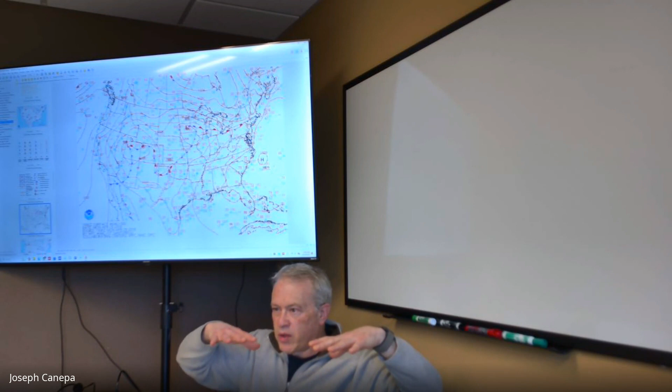And you can see here's another occluded front right here where there's two fronts that are slamming into each other. This front right here is moving slower. This one's moving faster and it catches up to it. So if you've got a warm front, warm air here, you've got cold air and it's moving toward that warm air. Because the cold air is denser, it slides underneath the warm front.

And you also have situations where you've got a warm front here, let's say, and a cold front here, and the warm front moves this way. And again, warm air is lighter, right? So just like a hot air balloon rises, it's going to climb over that cold front. That's an occluded front as well. So that's the difference between stationary fronts, the symbol right here, and the occluded front. And you can see it's got the combination barbs. Notice there's no colors here.

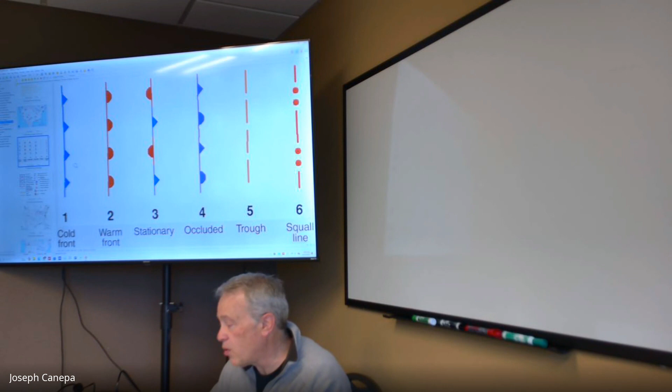It's just one color. So a lot of times you'll look at aviation charts or weather maps. They won't show colors for the maps. It's just the symbol itself. Again, the mnemonic I always use: cold fronts are biting cold. Okay, so here's all the different front symbols. You don't have to know all of these. The primary ones are these up here. So the cold fronts, warm fronts, stationary fronts, and occluded fronts.

Let's see here. Yeah, these are less important. This has to do with frontogenesis, the generation of fronts, and you're not going to see them on the FAA test. Trough, all that is, is just an area of low. When you think of trough, you think of something that's deep, like a feeding trough, so it moves down. So we associate troughs with low pressure. So you might see a line. Well, that's just a line of low pressure. That's all that is.

Here. Dry line again. Squall lines, obviously you want to be aware of what a squall line is. A squall line is a fast moving cold front, usually at the leading edge of fast moving cold fronts, and especially if you have water vapor in the atmosphere and you've got instability in the atmosphere, you're going to get thunderstorms. Now this last week, we were just talking about it. There was a very weak squall line that moved through the area here.

And all along, if you were to actually look at the weather map, and I encourage you guys to do this, look at a radar map when we have weather moving through, so you get familiar with how it looks. But what happens is on the leading edge of the cold front, it's pushing up all that air, and it's creating instability in the atmosphere. Because you've got cold air moving under the warm, damp air, it's creating these thunderstorms, and that's what happened with the squall line this last week.

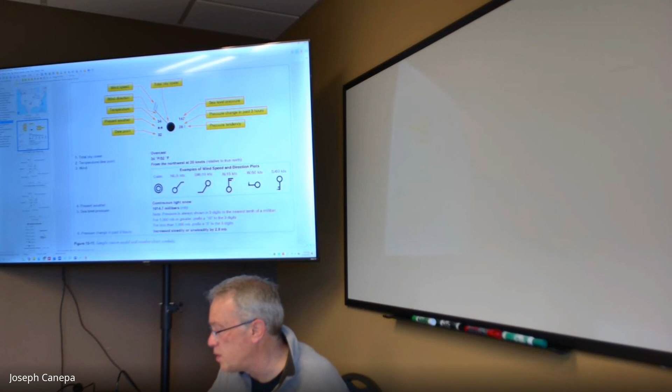Let's see here. Let's go to here. These are some different symbols that you see for winds. Here's another type of symbol that you'll see. Again, they all have the same format: temperature, dew point on this side, and then any weather. In this case, we've got rain here, and the sea level pressure. Normally, this is in millibars here, but I think a lot of U.S. charts will have this in inches.

Let's see here. Yeah, we've seen this before. This is the weather depiction chart. And what this does is it just tells you where the significant weather is, where the clouds are. In this case, you can look at the chart and you can actually see what it describes here. So in this case, let's see, it was issued at 1842 Zulu. So it's going to be like 9 o'clock. No, 1 o'clock. 1:42. Tuesday, December 15, 2015.

And it's valid. Whenever you see the word valid, it's telling you that it's valid at that time. So it's saying that this map is kind of a forecast, and it's going to be valid at 0 Zulu, which is that Wednesday night, for what the weather should be looking like right here. And they've got fronts in there. They're forecasting the fronts. There's a warm front coming up here, and then you've got a trough, a low pressure trough here, another low pressure there. But it's generating a lot of weather here.

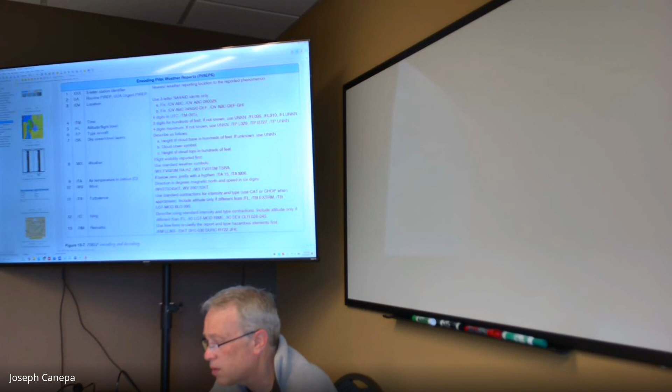In the cockpit itself, there's several tools we can use. If you're flying a really nice aircraft, you've got a Garmin 1000. There's a nice big display. It's maybe a little bit smaller than that log there. But you can bring up weather, ADS-B weather, on the display itself, and it's just tremendously helpful.

And they've got the NEXRAD, which is what ADS-B reports to the cockpit. And you'd have, like on your smartphone, if you've got it with you, which you probably would, products like ForeFlight. There's some products that don't cost anything. ForeFlight is kind of expensive, but it's a very good product, very comprehensive, and it would have those charts, all that weather information on there.

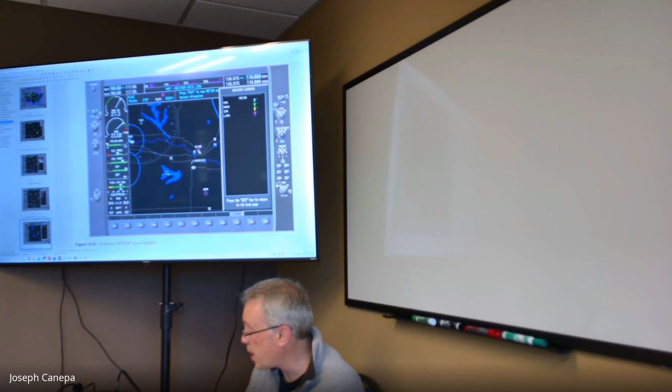Back in the old days, in the 80s and 90s, we didn't have any of that stuff. We had weather before we took off, and then hoped it didn't change drastically en route. So here's some other images of this. I don't want to spend a lot of time on it, but this basically is another tool that you can use to bring up information inside the cockpit. And again, you can use your smartphone, a tablet, an iPhone, or iPad to bring up weather as well. Okay. Any questions on that?

Right. Airport operations. This is chapter 14. So there are essentially 3 types of airports. You're going to have civil airports, military or federal airports, and then private airports. We've got probably close to 20,000 in the U.S., more than any other country in the world.

The U.S. has just a remarkable airspace system, and the government has done a great job of promoting aviation. The government realizes, as do a lot of pilots, that airports are economic engines for the local communities. They bring in businesses. They allow businesses to travel from one location to the other without having to go to a major city, hop out of a plane, and go to another. A lot of businesses use corporate aviation, a corporate jet or plane, to get around, and it's super nice.

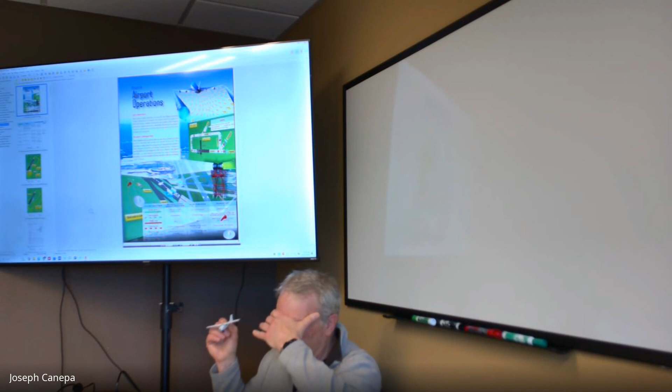If you've ever heard about it, there's this thing called airport surveillance radar, and they love doing that type of thing. What they'll do is they'll have you come in for a landing, and then, with an instructor, they'll have you put your hood on, and then they'll give you specific instructions how to come in and land.

They'll say, pitch down a little bit, bank to the left, stop bank, start bank, descend a little bit or whatever. They'll spoon feed you complete directions to get down. So if you're in the clouds and you need to get down, they'll talk to you all the way down, and they actually need to do that as part of the requirements.

So anyway, all that to say is that Sunday mornings they're dead. Fridays they're super busy, so that's probably their busiest day, at least that I've seen. Saturdays can be busy too. So again, find out the days that they're busy, talk to your instructor, and ask what days they aren't so busy. Normally, when I take students down there, it's not as busy, especially the first time.

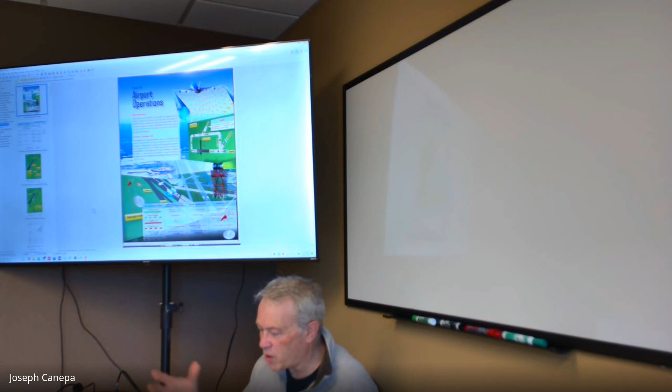Maybe later on we go and it's a little bit busier, just so you can hear what it's like for them to coordinate all this traffic, which is absolutely amazing. So, okay.

Let's see. So, different types of radios that they have there. This is 14.1. So you're going to have Unicom. That's essentially a frequency. It's also associated oftentimes with the CTAF, or Common Traffic Advisory Frequency. Common Traffic Advisory Frequency is going to be for airports like Reedsburg, not Madison. Madison has a tower frequency.

But a CTAF is Common Traffic Advisory. And it's just that. You break that term down, common traffic. That's for all the common traffic in the area there. So again, Reedsburg is 122.8. That's a typical frequency for that. Baraboo is a little more discrete, you have a different one, but in any case, you'll see that, and that's what you're going to talk to when you're coming into the airport.

Seems like a really simple thing, but a lot of times pilots will come in and they'll forget to change the frequency to the airport they're landing at, and they'll be announcing to everybody at the airport they're coming into, but nobody's hearing them, and that is a dangerous thing. The vast majority of mid-airs occur close to an airport, and that's because somebody didn't hear, or somebody didn't get the word out that they were coming in to land.

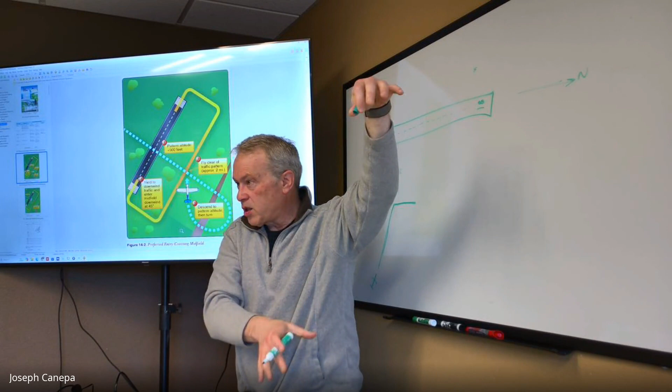On a Cessna, it's really easy to determine. As you're flying, you look out. Most Cessnas have that spar that holds up the wing. When you're 1,000 feet above ground, you're going to put the runway about halfway up that spar, and you're just going to keep it there. That's an easy way to do it. Over time, you'll know what it looks like if it's right or not.

Now, of course, you can use your altimeter, but if you can look outside, especially at an airport when you're coming in to land, it's safer because you have to scan for other traffic at every point, especially close to airports. Okay, so we get down to 1,000 feet above the runway. 1,000 feet above the runway is standard for most airports. There might be changes at some airports, but the vast majority is going to be 1,000 feet.

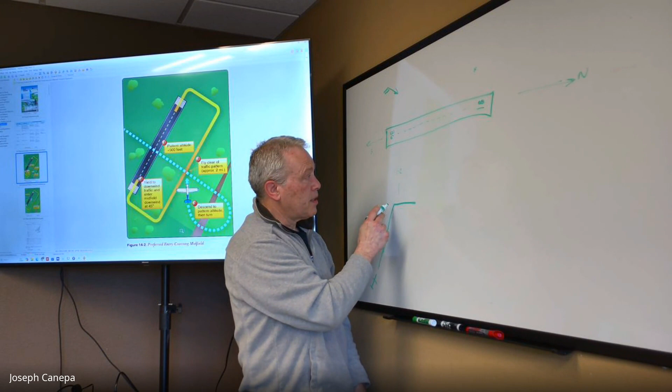That's our pattern altitude. So here, the elevation at Reedsburg is 920 feet, I think, something like that. Does anybody know what the pattern altitude would be here then? 1,000. Yeah. And so they usually round it up or down. In this case, it's 2,000 feet. So they give you a little bit of cushion there.

So we come in. We fly our left downwind right here. We make our announcement right here. When you turn the aircraft, that's when you make your announcement. The reason why you want to make your announcements when you're turning the aircraft is because the aircraft becomes more visible.

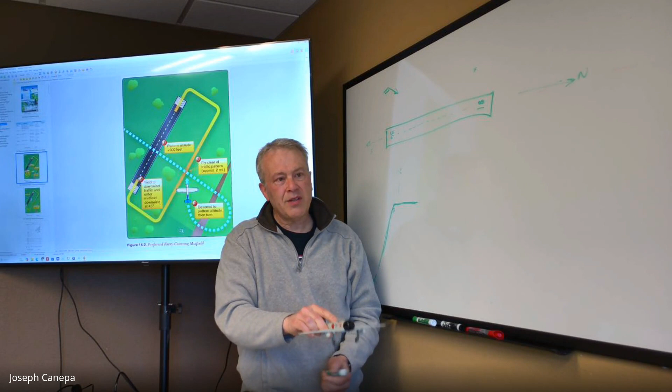Like when I hold the aircraft like this, you can't really see it. I mean, you can see it, yes, but when I turn it like this, now you've got the wings that are displaying. And as you're doing your turn, people can see that a lot easier, especially from a distance away. So always, if you can, make your announcements when you're doing your turn. And again, that gives you more visibility.

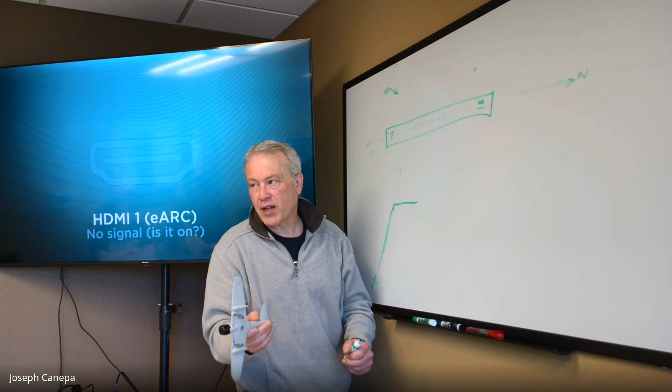That way, if I'm out flying and I see you out flying, I hear the announcement, I'm going to be looking for that aircraft. I'll be able to see those wings as they go into the turn there. So we'll make our announcement right here. The announcement goes something like this, and you don't have to go through it for the test. You're going to have to know it, obviously, for a practical test. When you actually go up, you're making radio calls.

But you'll say, Reedsburg traffic, Cessna 264 Romeo, entering left downwind 45 for runway 18 Reedsburg. So again, here we're telling them where we're at. Everybody knows pattern altitude at Reedsburg is 1,000 feet, so they know that they're at 2,000 MSL, above sea level. And so they'll know roughly where to look. They know that the left downwind starts over here at the start of runway 36 there. So that's where they're going to try to look for you.

And then here we'll just fly this downwind, and again, this is called the downwind leg right here. And the reason why it's called downwind is because our winds, I'll just repeat this symbol up here, the winds are out of the northwest. We're going down with the wind. We're traveling with it. As opposed to upwind, if a plane was traveling this way right here, let's say, this would be going up against the wind. Okay, that's the term. So this is the downwind leg right here.

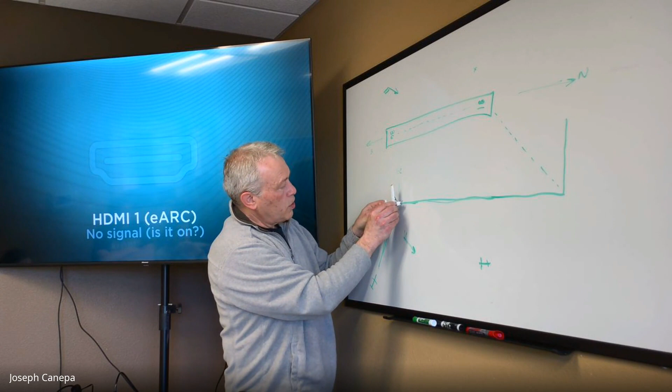All right, what you're going to do is you're going to come in and about 45 degrees out from your touchdown area, or at the end of the runway there, you're going to do a turn to left base. That's what this is called. You can call it base, but I like calling it left base because it's to your left. As I'm flying right here, I'm looking out, my left side is right here. And the reason they do that is because most pilots fly their planes with the pilot in the left seat. So when you're sitting there, it's easier to see that runway from the left seat. So that's why they fly the left base, or the left downwind and left hand pattern.

This is a left hand pattern right here. I'll show you what a right hand pattern is. You can actually figure it out too, just by looking at it. So again, this is the base right here. In this case, it's a left base, because we're in a left hand pattern. And then here we do a turn to final. We make a radio call right here.

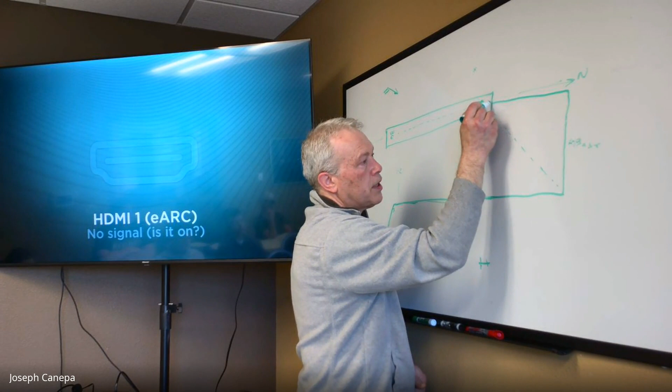We do a turn again where I'm looking out when I'm flying the aircraft. I'm looking behind me like this. And I look for that 45-degree point where it looks roughly about 45 degrees. And then I'm going to do my turn to left base. I'm going to make my radio call. Reedsburg traffic, Cessna 264 Romeo, entering left base runway 18 Reedsburg, full stop.

So what I've said there is who I am, where I'm at: Reedsburg traffic, 264 Romeo, left base. You're telling them you're turning left base right there, so they're going to be looking for those wings, and then you're telling them what you're going to do: landing runway 18, full stop. Full stop indicates that you're going to actually stop and then exit the runway, as opposed to a touch and go.

You could say, Reedsburg traffic, 264 Romeo, left base for touch and go, runway 18 Reedsburg. And that's going to let them know, let's say they're taking off from here, they're going to expect you to get down on the ground here and then power up and actually do a takeoff. Maybe you're just doing circuits or practicing your landings or something like that.

So again, all that communication you're putting into a small phrase, but you're very concise with it. It's communicating everything to anybody out there that wants to listen, and it's warning them that you're coming in to land. So be aware of that. So coming into final: Reedsburg traffic, 264 Romeo, entering final runway 18 Reedsburg, full stop.

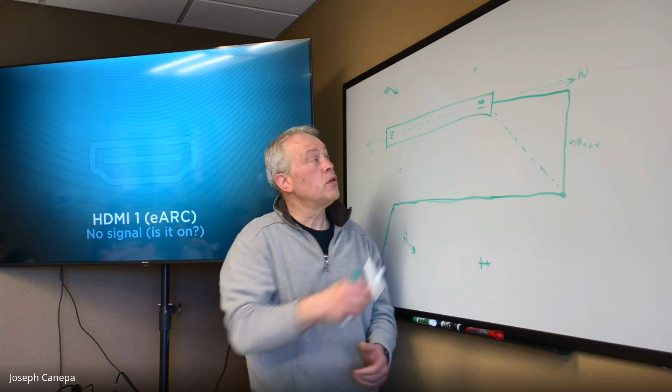Reedsburg traffic 264 Romeo is clear of the active, or 18. It's probably best to use the runway that you've come in on to say it. So you'd say Reedsburg traffic 264 Romeo is clear of 18. Anytime you cross a runway, so Reedsburg actually has another runway. It's a very short one, this right here. So here's the taxiway over here.

When the plane is taxiing, you're going to make announcements that you're crossing the runway. Anytime you cross a runway, you have to let people know, because there could be somebody coming in to land here, and they may not see you for whatever reason. So you just say, Reedsburg traffic 264 Romeo crossing runway 07. So yes, that's consistent.

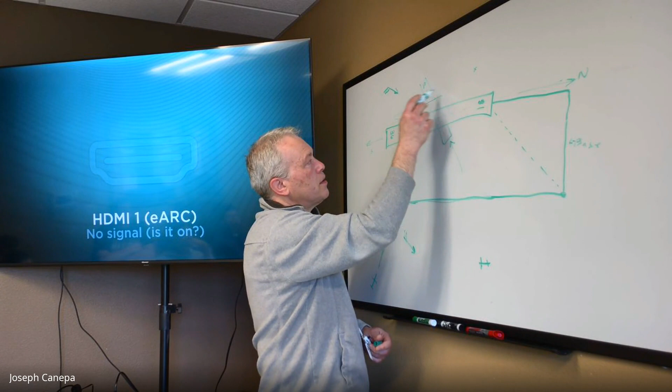Very well. But in any case, you have taxiways, and this is a common problem with traffic that's coming in, where you've got airports that have multiple runways. So you want to let people know where you're at. Again, the whole idea here is to be safe. Make those announcements and make sure that people know where you're at and what you're up to.

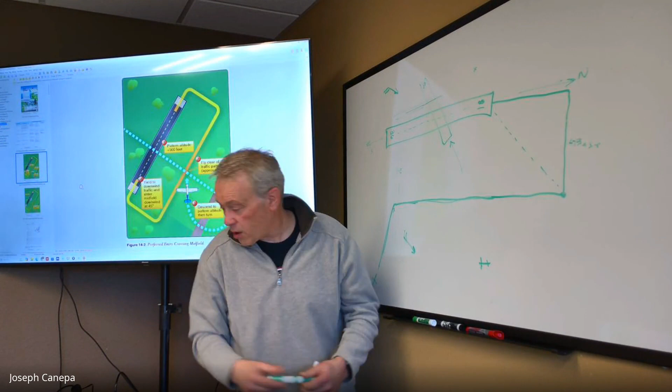So in the diagram here, they've got the plane crossing over the center of the runway and then in the left downwind. So that's a common tactic. This pattern right here works great if the plane is coming from this east side right here. But if they're coming from the west, what they'll do is they'll overfly the airport at 2,000 feet MSL, and they'll enter midfield left downwind.

So the call there would be Reedsburg traffic 264 Romeo entering midfield left downwind, runway 18, Reedsburg. They may make their call right here, and they'll say Reedsburg traffic over the field at 2,000, left crosswind for runway 18. So let's take a look at the thing. So this is downwind right here. Base right there, final leg.

Okay, and then can anybody tell me what this leg might be here? This one going this way. So we know we've got downwind, and what's the opposite of down? Upwind. Okay. So you've got down and up. This would be upwind. Again, you're heading up the wind, you're heading into the wind. So this is the upwind right here.

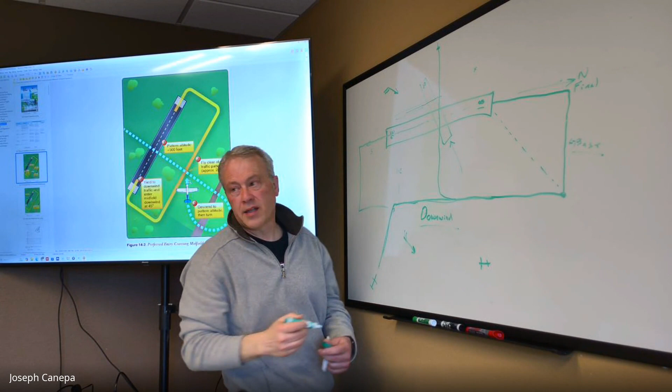And then this right here is called, just mentioned it. What's that? No. Now, if we're coming in here, this is the base there. Well, that would be true if we were coming in from this angle right here. But actually, if we're flying these patterns right here, the left downwind, the winds are out of here, this is called the crosswind. So again, base on this side, crosswind here, downwind, upwind. Those are the different parts of the pattern there.

Normally when we land, we don't talk about upwind, but if we do a go around, then we want to tell people that we're in an upwind. We're somewhere along that line right there. And then crosswind just tells us that we're over here. And again, it depends on the winds. Let's say the winds were out of the northwest instead, then this would be considered a right-hand pattern. So let's actually do that.

This just changes around. So let's just say the winds are out of the north here. So now, let's say our plane's right here. We're coming in. What we're going to do is we're going to enter in a right downwind for runway 36. Okay. So here the plane enters right downwind.

And the reason why that's right is because if I'm flying my plane right here along this side, I'm looking out the plane. I'm on the left side of the plane right here, right? So as I'm flying like this, I'm in this side of the plane right here. I'm looking out the right side of the aircraft at the runway there. So it's called a right pattern here.

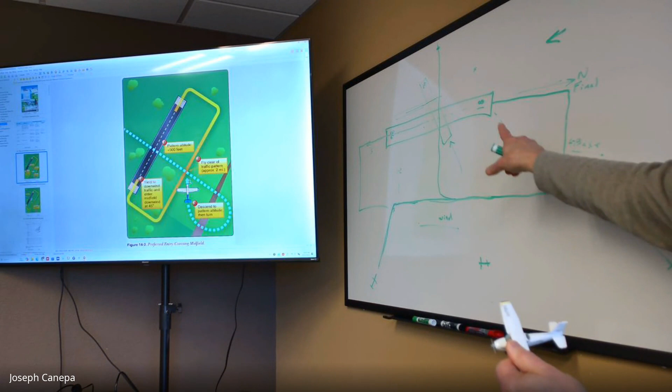So again, everything's the same. It's right downwind and then right turn to right base right here, and then final. We don't say right or left final because there's only one final, and the same with upwind. It's just upwind there. So, all right, does that kind of make sense?

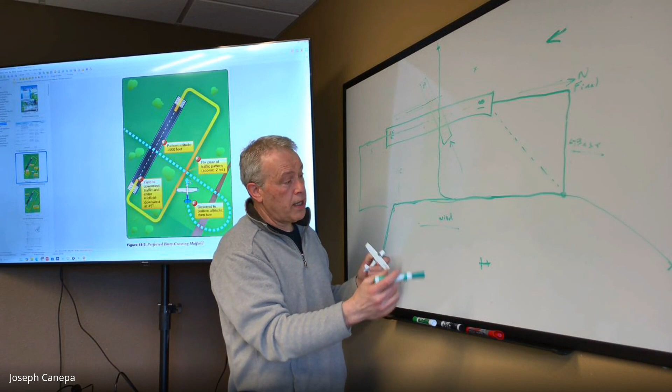Kind of. What don't you get? It's just something I have to do. Yeah. What you could do is look at those diagrams there. The thing here is, it really depends on where you're coming from, where you're landing. First off, you need to determine what are the winds for the airport? What's the best runway to reduce the amount of touchdown speed that I am coming into the runway?

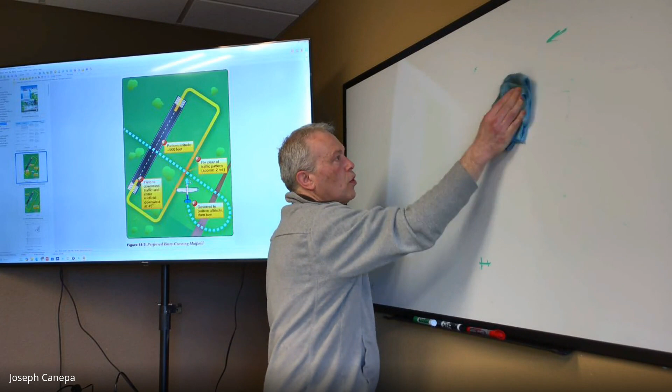We've done that, like here in this case. Well, I should probably erase. Let me just grab this here. So again, the whole idea here is you have to determine where you're going to be landing at. If you got a runway here, like this here, if the wind again is out of the north, I want to use this runway right here.

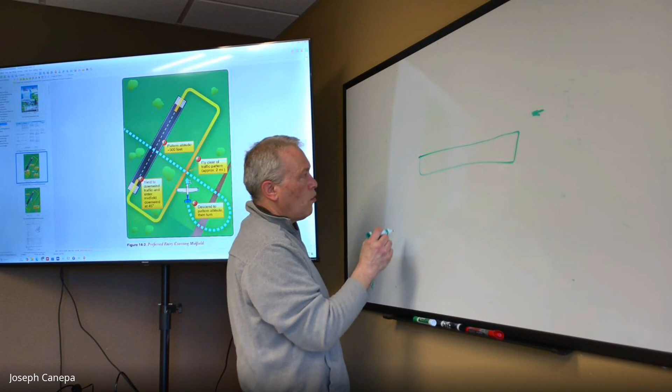And it doesn't make a difference where the aircraft is, over here, over here, over here. In this case, we want to get to this point right here to start our left downwind. This is the left downwind. Again, I put myself in the cockpit right here and extend my left arm. The runway is going to be here. So it's the plane right here.

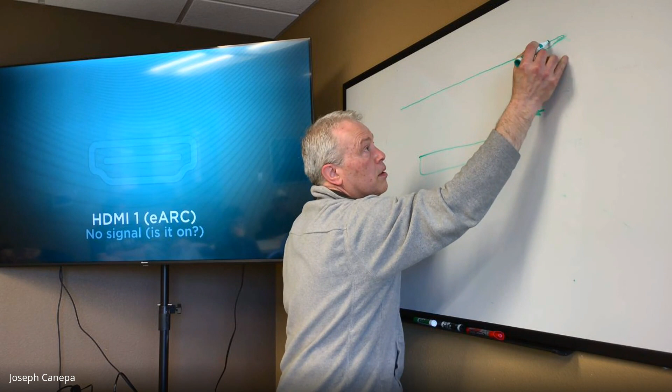Just there. And then that's me on the left-hand side. So I'm looking out at the runway as I'm flying there. So this now is the left downwind for, in this case, runway 36 here. So that's how I make that determination. And again, same pattern altitude, 1,000 feet right there on the entry.

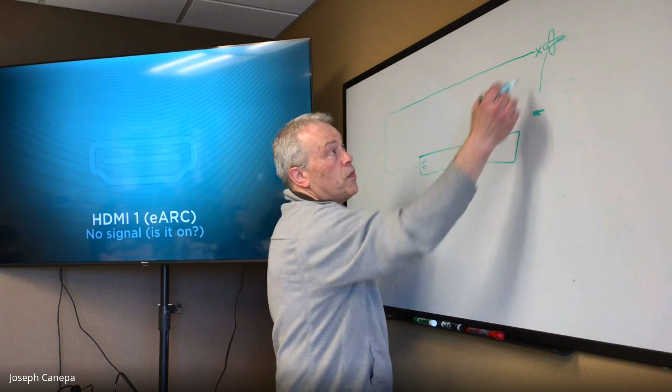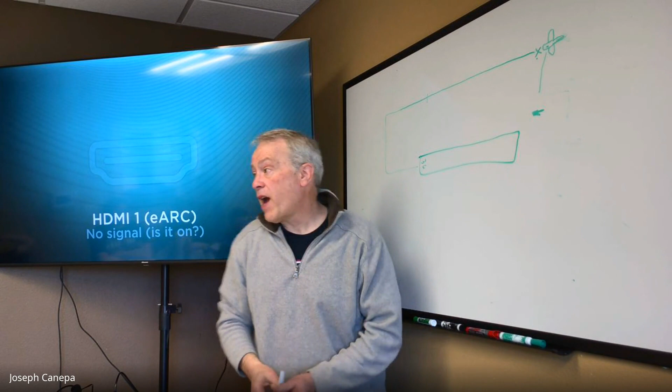And then at some point, depending on the aircraft manufacturer, the POH, they may have you start descending at this point. It could be out here a little bit further, or maybe over this way here. But the whole idea here is to have an orderly fashion for entering an airport. Now, this is typically a non-towered airport; you have to do the full pattern. Again, the whole idea here is to keep aircraft safe from each other.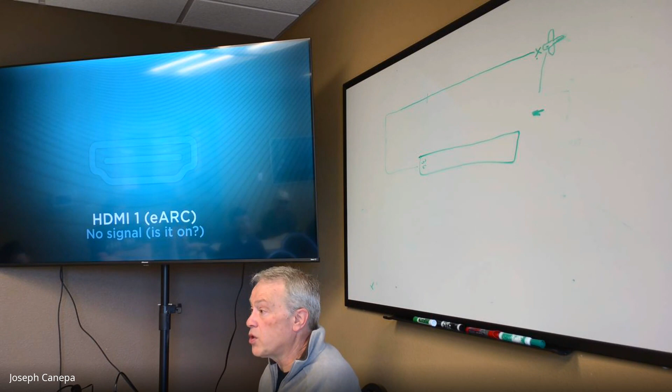At a towered airport, they may say enter 2 mile left base, or do a straight in for runway 36 or something like that. Because there's somebody watching you from a tower cab with binoculars, or maybe radar, even ADS-B, they can actually direct you to a specific point. They'll say enter left downwind for runway whatever. But if you're coming from this direction, they'll say enter a left base. They want to expedite the flow of traffic, and do it safely.

So in this case, this is our downwind right here. This is our base, and here's our final. If I'm coming in from this direction, they may just say do a long final. So I would fly over here and then do my final right there. Or typically they tell you to do a left base, like a 2 mile left base. So maybe out here they want you to enter it, and you'll come in to land there.

So that's what you're typically going to see for entering patterns. This is a crosswind right here, midfield crosswind actually over the runway. The whole idea behind this again is to prevent mid-air collisions. What they learned early on, it was just not a good idea to let anybody come in and land without some sort of organization. Each one of these turns is a reporting point where you're telling somebody out there that I'm there. Now there are what we call NORDOs, no radio aircraft, like a Piper Cub or something. They don't have any radios, so it's still incumbent on you to be looking outside the aircraft.

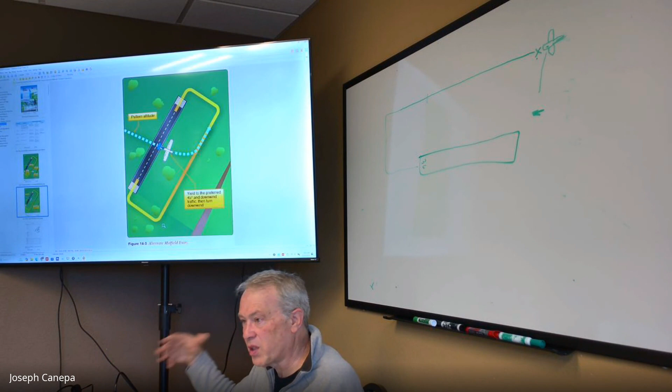One thing I can give you a hint on the test: in the testing supplement they give you, there is a detail of a chart supplement page in there. So use that if you have questions. If they ask, well, what does this mean here? Look through that chart supplement. You'll actually see they have a legend for it that describes everything. The answers are right there. You just have to be able to look for them. And again, that's in the testing supplement when you take the FAA exam itself.

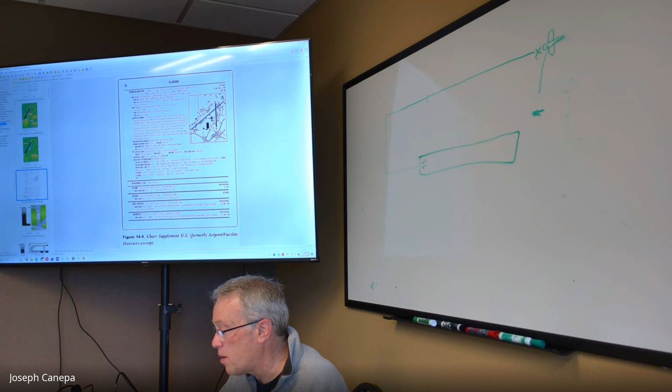So let's look at the airport signs. Airports can get really complex, especially larger airports. Reedsburg, not so much, because you've got just one runway. There's one major taxiway that goes here and it winds up down here at the terminal. And then this is the big ramp area. But Madison, for instance, can be kind of scary if you've never been to a large tower airport.

But the one thing that they both have in common is they use the same types of signage. And you'll see this pretty much anywhere in the world when you fly to an international airport, they all use the same types of signs. So let's get into the different types of signs you're going to see. Some signs are actually painted on the surface of the taxiways or runways.

This right here is a displaced runway threshold. So it's not relocated, it's actually displaced. You can tell that this right here is a taxiway, especially back in the sign in here. So these yellow lines always indicate that you're on a taxiway. White means that you're on a runway. So when you see white, you're on a runway. Yellow is always going to denote taxiways of some sort.

So this right here, that's a runway right there. This right here is a runway. And here's our displaced runway threshold marking right here. So a displaced threshold right here is just saying that you can take off from this area right here. You can take off or start your takeoff run here but not land in this area right here. And it makes sense when you look at that.

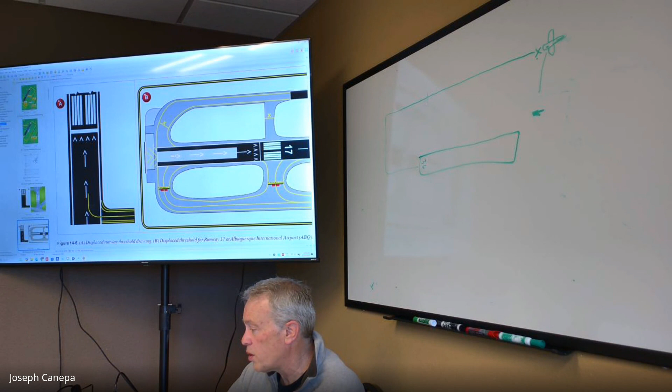So Reedsburg has got this right here on runway 18. If you taxi out right here, we could walk out there and you'd actually see these lines in the pavement, these arrows. That means you can actually taxi out here and do your run up and take off from here. You just can't land on that. Now, why would that be? You may know why that might be. Why do we have it displaced like this?

Think about Reedsburg. Okay, we've got this busy road right here, and the runway is like right here. So we've got Highway 33 that's right here at Reedsburg, and then here's the runway. Why would they displace this? Yeah, that would be one way of doing it. Yeah. It's for safety. They don't want planes coming in too low.

A long time ago, even before I was born, there was a plane that came in really low. Back then, there were just a bunch of car garages and gas stations right here. It came in so low it actually hit one of the gas stations. So the FAA said, listen, we got to make this safer, so let's displace this threshold, and then we're going to force planes to land further down the runway. So instead of coming in lower, like right here and landing, you're now going to have to aim for a point out here, further down the runway, so that they don't come in really low.

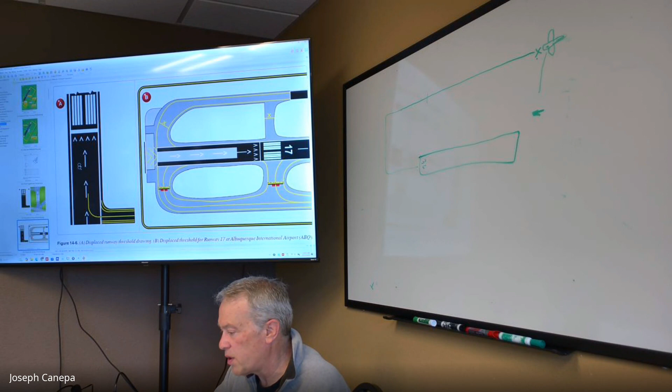So again, taxiways are always denoted with a letter. They're in black with yellow lettering. Okay, and you'll see them. Whatever taxiway you're on, if you see a black sign with a yellow letter in it, that's the sign. Now, one thing to help you.

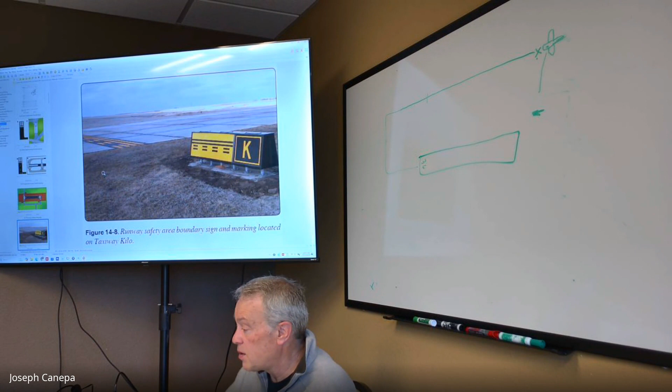And they get in hot water when something like that happens. It's their responsibility to help keep traffic safe, keep them separated safely. And it's also up to the pilot in command to make sure that they do it safely as well. So, okay, let's see here.

So at this point, if ATC said, "Where are you at?" I'd say I'm on Alpha at runway 14, and they would know exactly where to look there if there's an issue. You also will now know where you're at. On charts, you can actually see where you're at there.

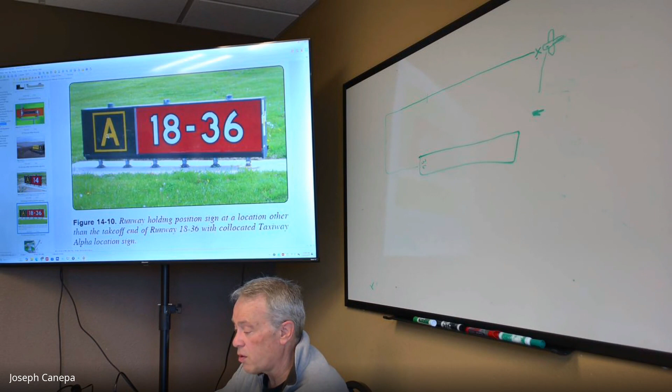Right, and on charts, oftentimes like in the taxiway diagrams, they have a bunch of different symbols on there. They'll show like the buildings and stuff like that here. So one initiative they started years back was trying to help pilots avoid some of the hot spots.

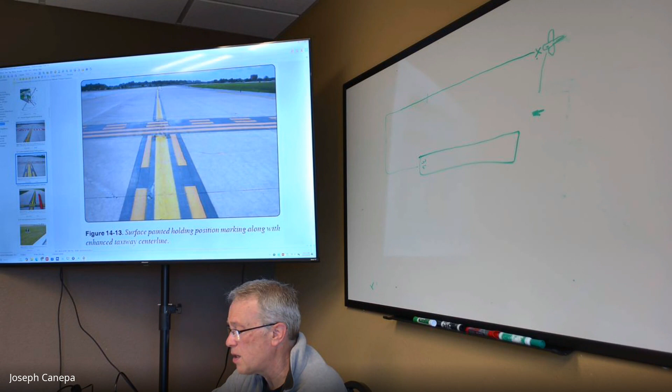When the plane's coming off, they'll follow that yellow taxi line and taxi past this threshold here. Yeah, the taxi direction there. We can see in this case we're just landing on this side, where the runway is right here. We cross the threshold and we're going to taxi along that yellow line to the FBO or so.

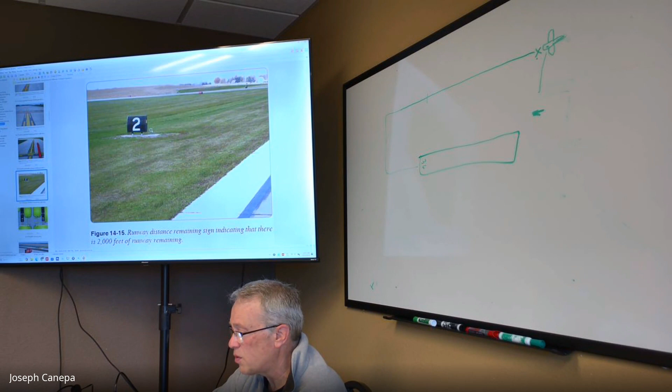Anytime you cross a runway at a tower airport, you absolutely have to have a clearance. You can't just cross a runway. You'll get into big trouble, and it's very unsafe. So the ATC is going to say, you know, hold short of runway 35 left. Then they'll give you clearance. They'll say, you know, cleared to cross runway 35 left, continue on, hold short of runway whatever.

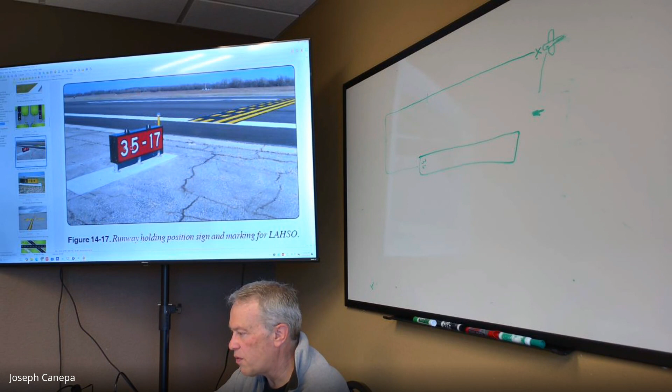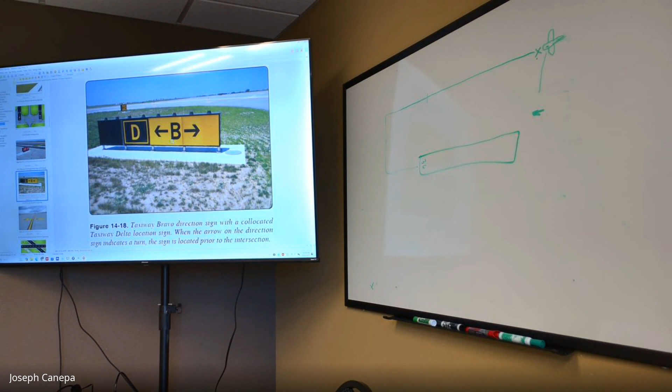You guys want to take a quick break? You want to keep at it? Do we want to take a quick break at all? Sure. Okay, break. All right. Let's break for like 5 minutes and then we'll dive back into it. We can get this out of the way then. We should do this for the next. All right. Let's get right back into it.

All right, so black again is going to indicate the actual taxiway that you're on. And then inverted yellow here, Bravo, that's going to be your next taxiway that's coming up. In this case, this taxiway is crossing in front of us here. So if we take a left, it's going to be Bravo to that direction, Bravo to the right. Oftentimes they will have pavement markings. Again, yellow markings indicate taxiway. Bravo is in this direction right here. Alpha is over off here. You can see all the pavement goes off in that direction.

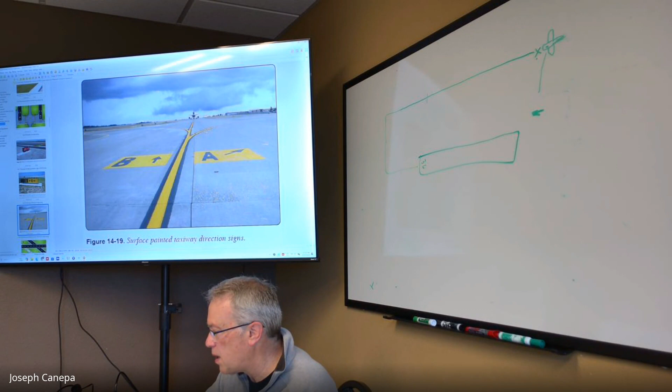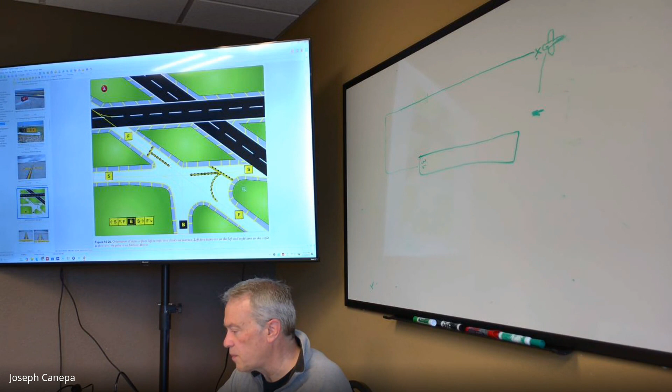Yeah, there'd be a threshold. They don't show it here, but there'd actually be a threshold marking right here telling you you're about to cross. Actually, yes, they've got this marked here. This right here, you'd see Foxtrot because you're on Foxtrot right there. You would stop here though before you cross that to get clearance. And same here. If I'm right here, we'd probably see a Sierra or S marker right here. Good.

Enhanced centerline. This is something that's relatively new. Normally a taxiway is going to look like this, but when you see something like this, that means you're approaching a runway, a hold position marking there. So it's just giving you a warning saying a runway is coming up. If you happen to see this as you're taxiing, that means you're approaching a runway. And here they say it's like 100 feet out, 150 feet out. So it's just giving you a warning. You got to be ready to stop.

Okay. These are destination signs. FBO stands for fixed base operator. It's what this building is. There's a fixed base operator here that handles gas, sells food and things like that. They're based at the airport, fixed on the airport, and they're operating. So in this case, it's just saying that the FBO is in this direction. Just keep going straight, and eventually this sign says turn to the FBO. That's typically where you would go to fuel up the tanks or something like that.

Again, these are runway destination signs right here. Again, here's the taxiway that you're on. Taxiway destination right here means it's crossing in front of you. So this is probably the taxiway right here in front of us. But these are runway destination signs. If I want to get to runway 20, I'm going to do a left turn here to get to the departure point of runway 20. Runways 32, 2, and 14 are off to my right, so I can get down to those departure points there.

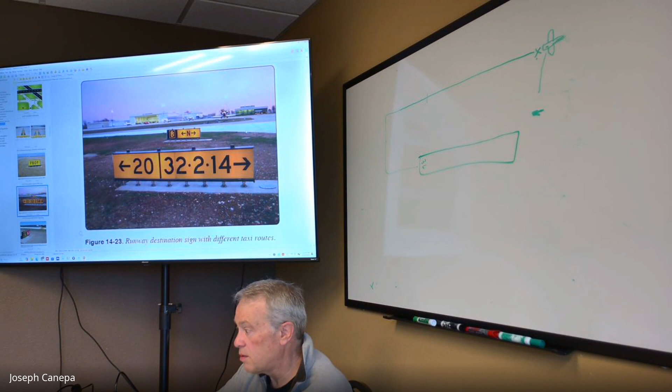Anytime you see something in yellow, it's usually informational, where red is really critical. You need to pay attention to it. Here's a good example of a red sign. Does anybody know what ILS stands for? Well, you can see it right there, I guess. It stands for Instrument Landing System. We know we're on taxiway Golf right here on the pavement. This ILS sign, what this is for is, here we go. So ILS stands for Instrument Landing System.

And what it is, it's a beam of radio waves that is projected from the ends of runways so that pilots can come in, follow that beam all the way down to the runway and land. Why do you need to do that? Obviously, if it's really cloudy, really foggy or whatever, they need that instrument landing system so they can follow that beam down to touch down safely.

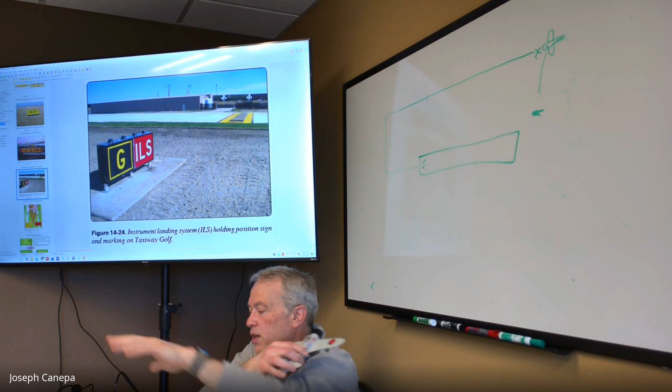The problem is those are radio waves, and airplanes are made of metal. This right here is the antenna. If you taxi a plane right here in front of that antenna, a plane that's receiving that signal may not get the right signal because it's reflecting off your plane. So what they do is they put in these ILS hold short markings right here to have planes stop before they cross into that area, where this guy right here is landing on this runway, and he's on the glide slope.

And if this guy was out here, like right here, and this plane is here, it may have twisted that signal around so that this guy thinks he's now on the right flight path and he actually isn't. So they do this because obviously you don't want planes getting those incorrect radio signals. Normally they're not always active.

These hold short guidelines, hold short sign or threshold there. Usually they're at bigger airports because bigger airports have ILS systems. They're more expensive. You don't see them typically at an airport like Reedsburg or Baraboo. Baraboo does have a localizer approach, but at Madison there's several of these down there because big planes rely on the signals to get in, and so they'll have you hold short of the ILS hold short lines there.

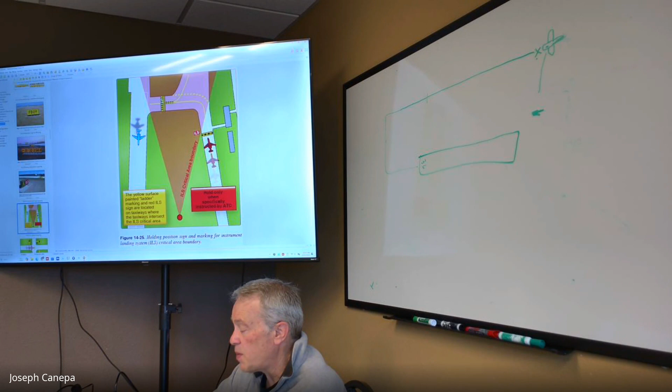So this guy here is taxiing out. They'll give you specific instruction to hold short of the ILS threshold there. Even though the actual runway threshold is over here, if this guy wants to take off, this pilot would come around here, taxi up and hold short here. Under normal circumstances, if it was VFR conditions, they take off. But in this case, because the weather is bad, they're going to stay short right there. Make sense? Okay.

Yep. Again, this is a taxiway hold short line right there, just a black marking with yellow dashes in it. At really busy airports, like Chicago, Milwaukee, maybe Madison, they may have something like this right here. They may have you hold short of that line, so we'll say hold short of Bravo at Golf. So you taxi up to this, and that's because you may have larger aircraft taxiing in front of you or something like that. So there's runway hold short lines, and there's taxiway hold short lines.

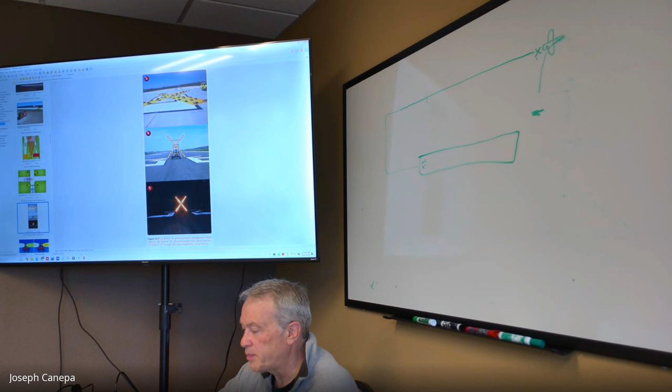X, you can probably guess, means don't land here. You'll see X's on runways when they're doing construction on it, or if they're tearing it apart. And it can be anything. It can be a tarp laid out in the form of an X. It doesn't have to be any particular sign, and it doesn't even have to be lighted. To close a runway, they'll typically put something, like in this case a tarp, just a yellow X on the runway. That means you can't land there. Very simple. If you see a lighted X, don't land on there. That's usually because either the runway's unsafe or they're doing construction on it.

I can see the Baraboo beacon easily from Madison at night. If you're at 5,000 feet, you can easily make it out on a clear night. In some cases, I've seen it from even farther away, but the visibility has to be really good. So these beacons are really strong. Reedsburg doesn't have quite as strong a beacon, but it's still very visible from 5-6 miles away. You can easily make out Reedsburg's beacon.

Glide slope, this is what's called a VASI, or visual approach slope indicator. There's several different types of VASIs out there. Let me back up a second here. There's one thing that's peculiar about beacons, and maybe one of you guys can tell me: if you see a beacon rotating during the day, does it have any meaning? Like if Baraboo or Reedsburg's beacon was rotating during daylight hours, does that indicate anything? It does. Any idea what it might be? Bad visibility. Bingo.

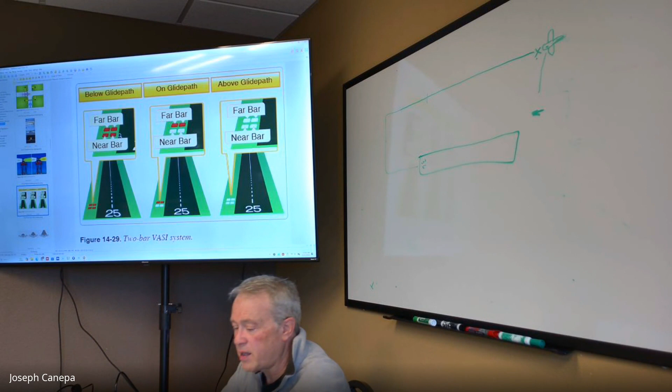I'm going to get into all of them. I'll let you guys kind of read up on it because I'm going to keep moving here. So this is a 2-bar VASI right here, and it's got 2 near bars and 2 far bars. Essentially, the idea behind a VASI is that it gives you a visual indication of your glide path.

So if you're on the glide path right here, the indication is you're going to have 2 red lights and then 2 white lights in front of it, and you'll actually follow that glide path down. And as long as they don't turn to both sets of reds, like this right here, the far bar and the near, if they turn to red, then that means you're below the glide path.

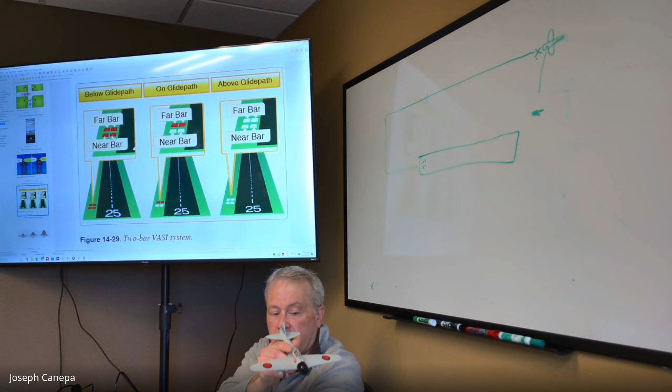So here's our runway. I'm coming in to land. Usually it's about a 3-degree glide path coming in to land. So when you come in, you'll see the 2 red and 2 white. That means you're on the glide path. If they both start turning to white, that means that you're higher on the glide path. You're too high. You're going to come in steep, and your glide is not going to be as good, guaranteed.

Whereas if you're low of the glide path, right here, you're going to see 2 sets of red lights or indicators there. And on the glide path, 2 red, 2 white. Now there's 4-bar VASIs. So they get more complex, but they all do the same thing. They're designed to guide you in to land.

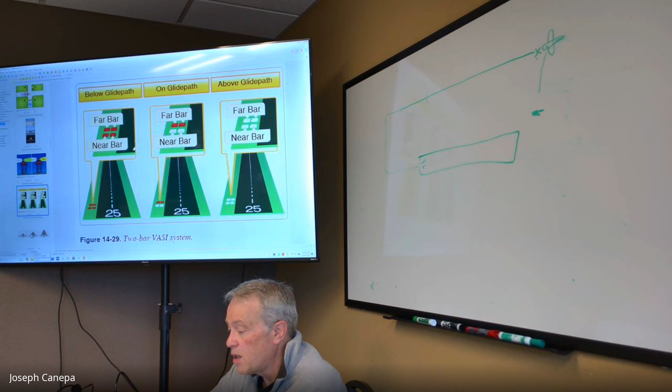So I don't like these presentations here. I think I've got some other pictures here we can use. But this kind of shows you what you would see from the cockpit when you're looking. If you're too low on an approach, the runway looks flatter and it's kind of squashed there. If you're on approach slope, you've got this nice trapezoidal figure right here. And again, 2 reds and 2 whites here. If you're too high, now you're starting to come in higher.

And you could play around with this at home sometimes. Just lay a long sheet of something out, like a runway or whatever. And if you look at it like this, really low down to the ground here, it's going to have this shape right here. Whereas if you look right over the top of it, it's going to look more like this. It's going to have that view. And I'll show you what it means here.

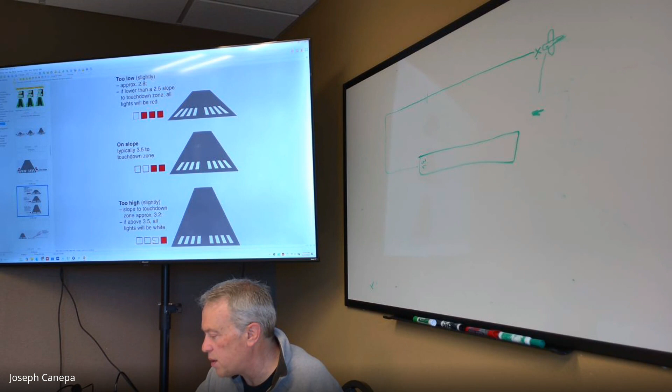Again, this is a PAPI. This is another type of visual approach slope indicator here. It's got the 4 lights here, and 2 whites and 2 reds indicate you're on the glide slope. 3 reds and 1 white would indicate that you're slightly low. All 4 reds would indicate that you're below the glide path. And again, here you'd have 3 whites and 1 red. You're slightly high right here. And then all whites, you'd be really high right there. So yeah, here's a little cross-section view of that.

There's PLASIs, which is a pulsating light indicator. Again, same principle in operation, with the details on it that you guys can read there. So yeah, they've got some really complex systems, but what I wanted to show you right here was the approaches. This right here is an aircraft that's on the right glide slope. So this is coming in to land at an airport. You can see the runway right there. This is what it would look like if you're on the glide path.

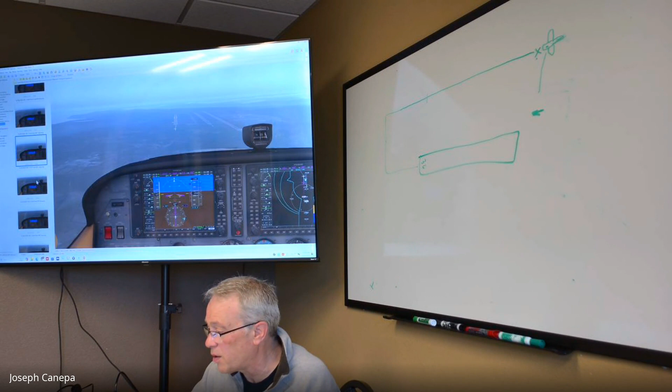As opposed to, let's go to some other ones here. This is a 2-mile final at 500 feet high right here. So you're too high on the final. Notice that the runway is extending out. It's a little bit longer there. Let's go here to this one. This one, you're 2-mile final and 200 feet low. And see the difference between these two? That's high and that's low. That's what it looks like.

I think when you're in the plane and actually seeing this, it makes sense. But there's a definite distinction in the shape of the runway between a high approach and a low approach. That's a low approach, same distance, 2-mile final. This one's low and this one's high. Right here, okay, and this would be extremely low right here. This guy's got to be 500 feet below the glide slope there.

So here again, and that right there's our 4-bar VASI. These are all horizontal across there. You've got 2 whites and 2 reds. So this pilot right here is right on the approach slope for this runway.

That's what we want to see when we come in. And what you want to do, you should strive for this in all your landings. You want to get your plane configured, and you want to get it so that you stay on this, so you're not constantly adding red and then also white and red. It makes it very difficult to land. If you could get this constant, then those lights stay constant the whole time, then you're going to have a

smoother landing. So let's get back again to 2-mile final, 200 feet low, again, very low, as opposed to this one, which is only slightly higher. So this is the difference between the low approach. Again, see how flat that is right there. This is almost like a little flat trapezoid there. This one's a nice long one. So now we're starting to get high.

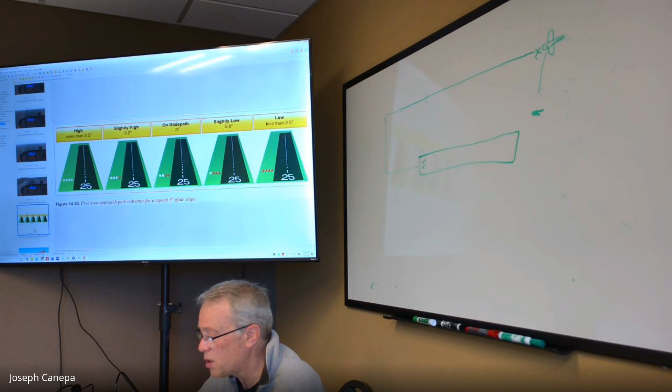Pulsating lights. So these actually have pulsating lights. It'll be pulsating red if you're below the glide slope there, steady white if you're on the glide slope, and then pulsating white if you're above the glide slope. And again, that's a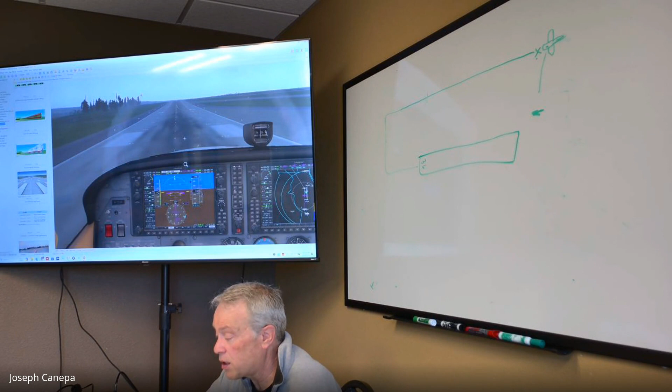When we come in to land at Reedsburg, we'll only see the side lights for the runways themselves. There's nothing else. We'll see the outline of the runway, but we won't see all these center lines and stuff like that.

Okay, so the other thing you can do when you come in to land at an airport, you can key your mic. So let's say we're coming in to land at Reedsburg or Baraboo. You can grab your mic and you can actually key it 7 times in 5 seconds. This is called pilot controlled lighting, and it'll bring up all the taxiway and runway lights to full intensity. And that's really helpful when you're trying to find an airport. Sometimes it's not that easy to spot an airport. Maybe the beacon is blocked off or something like that.

But if you key that mic 20, 30 miles out, it's going to light up that airport and any other airports that are on that same CTAF frequency. They're all going to jump up. And Baraboo has, I think, REILs as well. So there's an acronym, REILs, which is an abbreviation for runway end identifier lights. And those will actually, at Baraboo, kick in.

If you've ever driven by Baraboo at night and you've seen flashing lights, that's somebody keyed the mic to land at Baraboo. And they usually stay on for, I think, 15 minutes or something like that. So they'll be flashing. You really notice them when it gets foggy.

And REILs are really nice to have because if you are in low visibility, let's say the visibility is down to like 3 or 4 miles and you're coming in at night, having those runway end identifier lights really helps you identify where the end of the runway is there. You can kick the intensity down by clicking the mic 5 times and then 3 times. Questions?

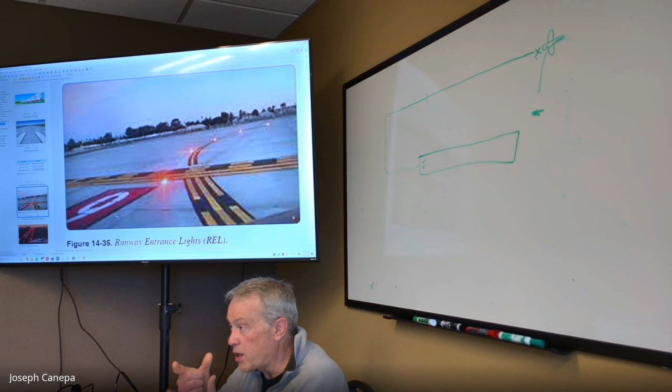So if it is a tower airport, couldn't you just ask ATC to bump up the intensity of the lights if you're having a hard time identifying it? Yeah, there's things they can do. They actually have what are called light guns, which we'll talk about in a second. They can actually aim those at you. They're very precise. It projects a very strong red, green, or white beam of light toward the person, so they can help you identify that location at the airport.

So they may use something like that, but they would also consider bumping up the intensity of the lights. And they oftentimes do. If the pilot's in distress and they need to get down, they'll do that. So Johnny brought up a really good point: whether you're an existing private pilot or a student private pilot, you need to ask. ATC is there to help. They're there to provide safety in the airspace system, and they want to help.

I don't know how many times I've talked to them, and they said, "I just wish the pilots would ask us more if they need help with something." A lot of times we feel like, I don't want to bother ATC, but they really want to hear from you. It helps keep other aircraft safe, and it helps keep you safe. So again, ask. And especially if you're in any kind of trouble, ask ATC. Don't worry about any enforcement actions.

The types of enforcement actions I've seen have been pretty light for some of the issues that pilots have done. But obviously, if you do something intentionally, that happens. A lot of times ATC, they're not police. They want to help.

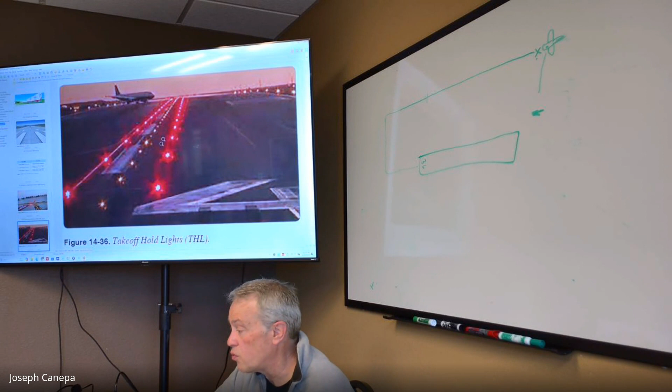Does it also work for landing? Yeah, it could. I don't know if that's what they use it for. I think it's primarily for taking off, but I don't see why they wouldn't be able to use it for landing as well. So again, those are just red lights there. And again, the big thing with the FAA is runway incursions. They want to cut down on the number of runway incursions.

So obviously, one of the things when you're flying into an airport like Reedsburg or maybe a really small airport where there's no AWOS or weather service or anything like that, they may just have a windsock out there. Reedsburg does have a windsock, I think, over here. I think they've got a wind tee or a tetrahedron on the field as well. I think it's over there.

When you take off, where you're going to leave today, if you look over on that side of the field, you might see something in the ground that's big. It's huge, about the size of this room. That basically rotates around in the direction of the wind. So these are various wind identification devices here. The windsock is the most common one.

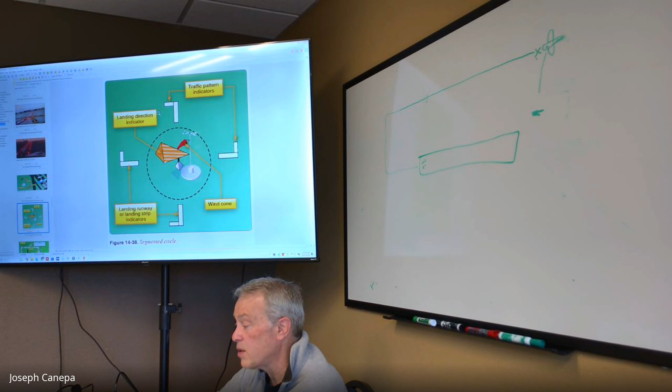Normally, before you even go to an airport, you're going to look up what the pattern is for that airport. Normally, it's going to be a left-hand pattern. But like I said before, some airports have right-hand patterns. Any questions?

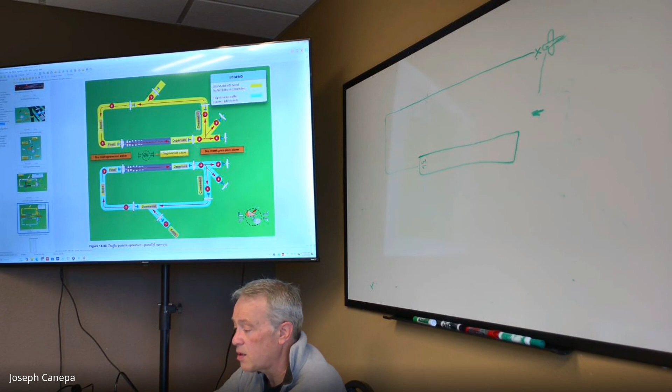The reason why we have this pronounced phonetically is because in the aircraft, radios have static. There's other kinds of issues with them. We can't always make things out. But if I hear somebody say, all right, turn on to taxiway "iskey," then there's no other letter that has "iskey" in it other than Whiskey.

So what they're trying to do is, certain letters like S and F sound very similar, especially if you're on the phone with somebody. So by spelling out Foxtrot, that sounds totally different than Sierra. So S is Sierra and F is Foxtrot. So it's very simple. That's why we use phonetic pronunciation, because we want it to be very clear communications.

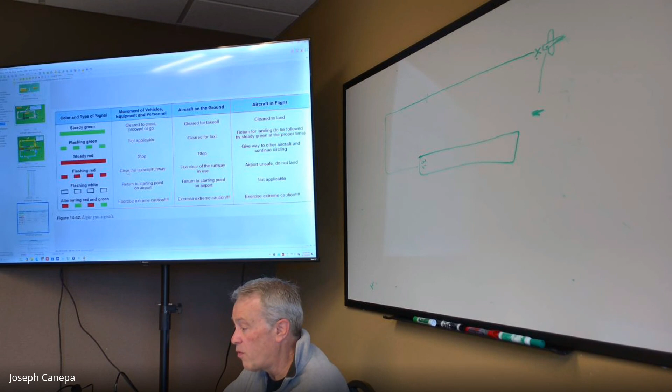Or they may say return for landing; this is a flashing green here, return for landing. Steady red obviously should be a caution to you: give way to other aircraft and continue circling. Flashing red, they're telling you the airport is unsafe, don't land. That's the most critical one.

If you see that, then obviously you've got to pay attention to the area. Then again, red and green just means exercise extreme caution. Again, you do need to know those for the test.

All right. Okay, radar beacons. We'll just finish this; I think I'm done with this chapter here. We've actually gone over vortices already. So, a transponder is a device that is in the aircraft. It's a transmitter and it's also a receiver.

You've got a radar beacon at some airport. Let's say this right here is my radar beacon, and it sends out a radio wave. It just swings around. We've all seen pictures of radars working, with the sweeping arc. When that arc hits the aircraft, there's a little receiver in there called a transponder. It gets the signal that a radar beam passed through it.

And what it does is send back a ping to the radar facility saying, my transponder number is this. That's called a squawk code. We enter the squawk codes into the transponder using either knobs or push buttons and type that number in. They'll give you a squawk code. They'll say squawk 0412 or something.

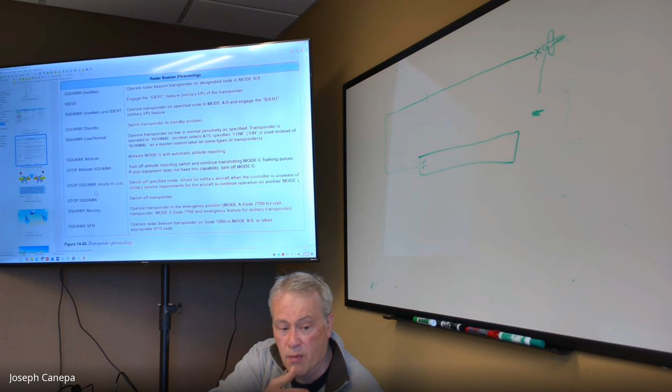So they'll use things like squawk standby, so you'll switch your transponder to standby. Squawk normal, you don't see that very often. Squawk altitude means your transponder should be set to mode C. There's a little switch on your transponder to set altitude or mode C.

Stop squawk, which means just turn your transponder off. Squawk Mayday, which would be 7700. That's the number that we put into the transponder. And what that does is it lights up their radar display instantly. It tells them, okay, this is the guy we want to focus on.

It'll also notify anybody else that has radar traffic that's looking at your airplane. It'll light up on their displays that there's maybe a situation there. Squawk VFR is just 1200. So those are the different codes there for squawking. Let's see.

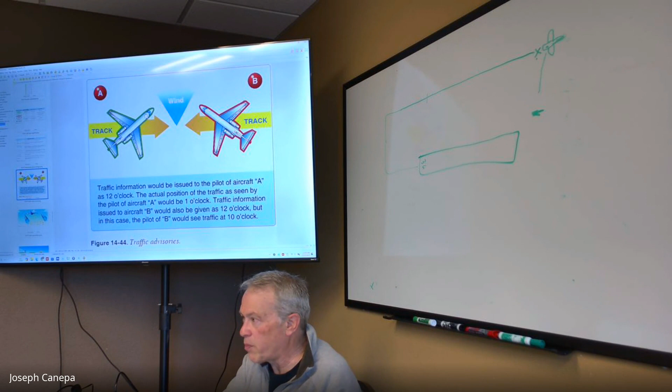Your rudder is not on the canoe. If you had a rudder on the canoe, you wouldn't have it constantly turning. It would just be inefficient. So you just point the canoe up the river, the ship up the river. All right, then this other stuff, the wingtip vortices, we already talked about that, so we don't need to cover that. Let's see here.

Again, we talked about this before, runway crossings and stuff like that. This is an example of a plane that crossed the runway holding position line right here. You get a big jet coming in, obviously. When they tell you to hold short of a runway, they mean hold short of the runway. Anything past that is a runway incursion, and they're really sticky about that. There's been a number of high-profile accidents because pilots broke that simple rule.

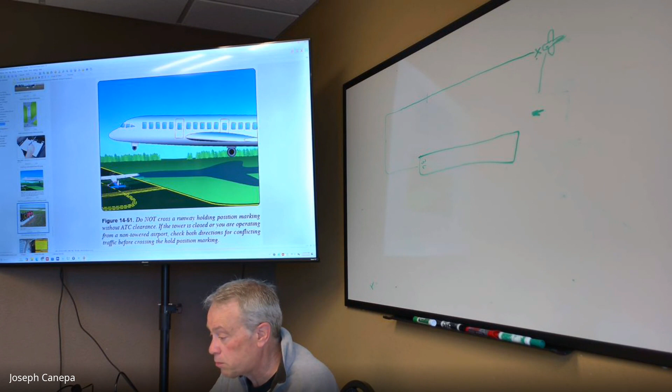The pavement is designed to break up and not cause as much damage to the aircraft, but it slows it down really fast. It's very effective stuff. It creates a lot of friction and it slows the aircraft down. So if there's an incident with the brakes, or maybe the pilot couldn't land in time, it's going to sink into it and slow down.

So would the pilot pay for it, or the airport? What's that? Oh yeah, who pays for it. That's a good question. If they're at fault, it would make sense that they would have to pay for it. But I never had to use it myself.

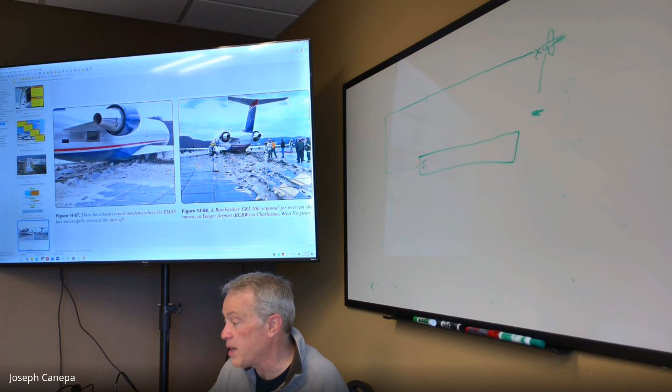All right. So next week we're going to do airspace really briefly, and then we're going to dive into navigation, and then aeronautical. Start working on your E6B computers, those slide rules. Start reading the manuals that came with them, because we're going to fly through that next week. We won't have a whole lot of time. Next week should be our last meeting. If we need to, we can always schedule another one too.

Let me know if you want to do the flight sim sometime too, because this week is a little bit better for me. Okay. All right, we're good. I'll keep in touch. I almost got the plane done this week, but we delivered 3 simulators, so I was busy with that. I'll definitely get you going. Take care. Thank you.